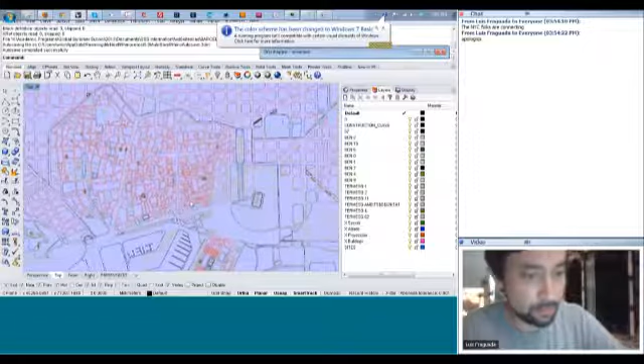All right, so it seems like New York is coming online. Okay, we're ready. Oscar, can you see and hear us? Yes. Very good. Hello Luis, hello, good morning. Can you hear us? I can hear you guys just fine, yes. Can you hear me okay? Yes, very good, very good. Can you see the screen okay? Yes.

Should I open my Rhino? Yes, just give me a little bit of insight. Have you guys used Rhino before? I've used Rhino, I've been using it for about maybe 3-4 years, but I haven't used it for the past maybe half a year to a year, so it might be a little rusty. How about Grasshopper? Grasshopper I've never used. Excellent, excellent, great. I'm excited to get you guys to try it out and play around with it. How about Philip? How's his Rhino and Grasshopper? Yeah, I've used both. I tend to work with 3ds Max.

Luis, we're thinking of sending you the meeting through my iPad, so we can work on my desk on my laptop. Would that be better? Because I don't have a double screen on the laptop.

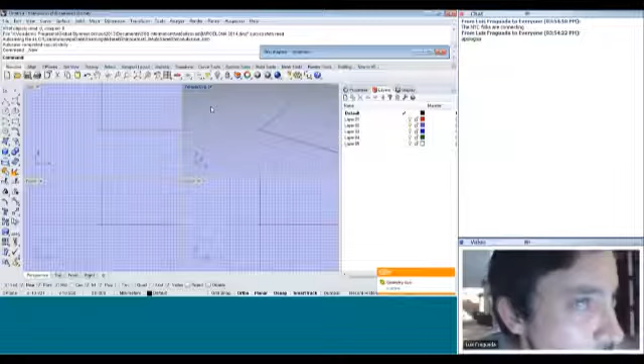Yes, that's okay. I mean, how you can connect as well on your iPad, right? Yes, I'm actually logged on to it. I see the meeting here for 9:30. So if I join it, I could probably cancel this one. Okay, give that a try, see what happens. Yeah, I have an app for the iPad.

So Oscar and Philip, this is a bit... You see in the video. Can you see?

Okay, a bit of an industrial kind of warehouse. Some other guys, this is Dori, Taran, this is Meran. They're helping us here with summer school. Now our students are actually out on the town measuring some stuff, so I wanted to take this opportunity to have a session with you guys.

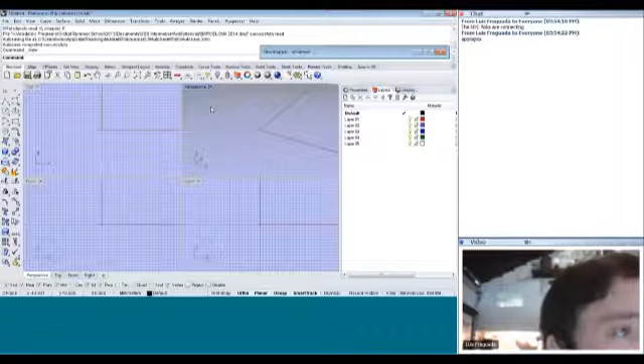Well, I hope that the session will serve as being informative and kind of introduce you to the interface, and maybe also why we would want to use something like this, this kind of a way of working. Okay.

Are you guys ready with the presentation and the laptop to use Rhino? Yes? I'm trying to... I didn't hear.

Alright, I got you guys, but you're muted. Am I muted? There it is, muted. I unmuted you. Alright, I think I have the ability to mute you and unmute you. Anyway, cool.

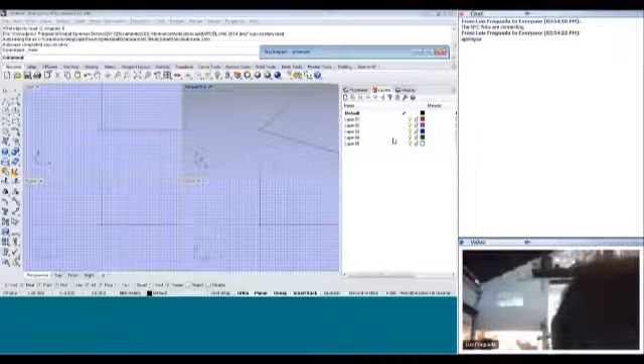Okay, so is this tutorial that we're watching today more of an introductory one? Exactly, that's right. Yeah, okay. Right. So...

All right, guys. Whenever you're ready, just let me know. Okay, ready? Yeah, I'm just trying to get this thing done. Okay, yeah, you can start now.

Okay, so what I wanted to show you is a little bit of why Grasshopper exists, how we start to use it, and its relationship with Rhino. I don't want to talk so much about Rhino, which is not typical - I usually start with a decent introduction to Rhino, but then go to Grasshopper. But I guess what I wanted to get into directly is just Grasshopper. Let me first talk about why it exists.

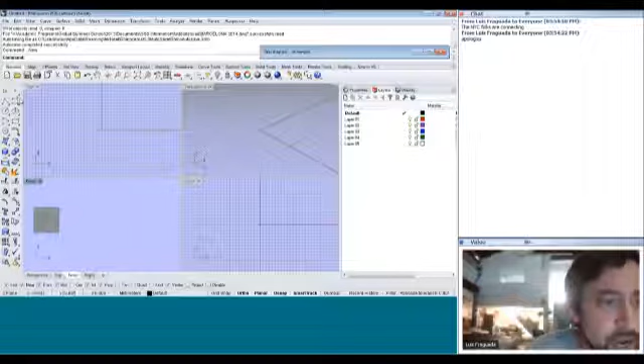So let's just go over here in the front viewport, and let's draw a control point curve. I'm going to choose control point curve with the left mouse button. It's going to ask me where I want to start the curve, and essentially I'm just going to draw four points, something like this. Yeah? Okay.

Now, because I drew this in the front viewport, it was using the XZ coordinate system that the viewport has tied to it. If I look at it in perspective, obviously the curve is sitting upright, with most of its coordinates on the y-axis being 0. So it's just a flat curve, etc.

So what I'm going to do is copy this curve, and I want to make a loft surface from it. Okay.

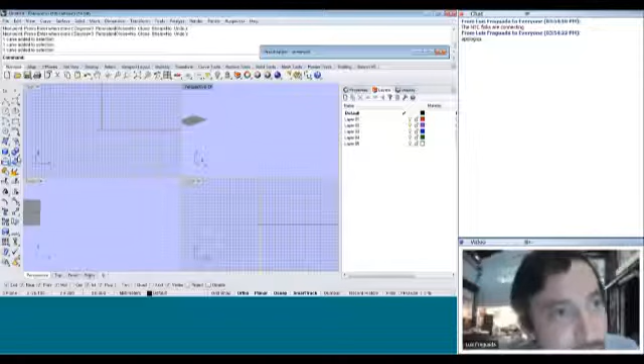I'm going to select the curve over here. Philip, if you've used AutoCAD before, Rhino is pretty straightforward. Yeah, it's a pretty natural extension, and it's where AutoCAD starts to... well, now AutoCAD is much better at 3D, I have to say. But 5-7 years ago it was still not so nice to work in 3D. So Rhino is a good extension of AutoCAD when you start really working in 3D. If you're used to the command line, Rhino has a great command line, but there's a minimum of 3 ways of doing anything: the command line, the buttons, and the menu. Anytime you use the menu or buttons, you see what command comes up, so it's very similar. Actually, Rhino used to be a plugin for AutoCAD to open different kinds of file formats, and then it got rolled into its own software package.

I am taking this curve, which is a control point curve, and I'm going to copy it. You can imagine the command 'copy' here. I'm just going to type in copy. Now if I keep reading the command line, it's guiding me, asking where do I want to copy it from, and some other options. I'm just going to click freely, click a point, make 2 copies, and press enter to finish the command.

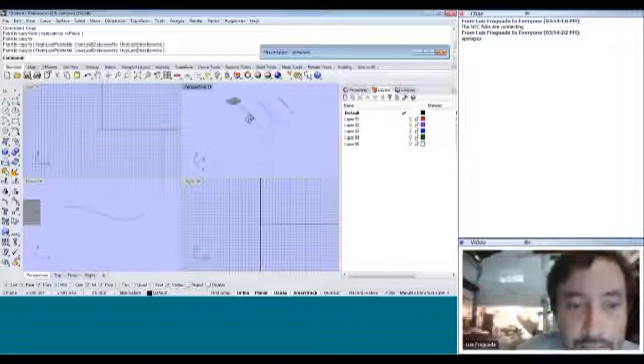So did it copy it because it's offset? Is there a certain distance it's offset at? All of these distances and numbers you can set in the command line, but I've just done it by clicking, clicking in some position, moving over in Y, doing it by hand. But all of these things you can eventually control - if I said I want to copy this from 0,0,0 to, let's say, 0,20,0, it'll make a copy exactly 20 units away. In any case, I'm just going to do it imprecisely now, just eyeball it.

In order to make this a little more interesting, I'm going to take my middle curve and edit its control points, just to make it a little different than the 2 end curves I have here. To do this, I'm going to go over to the PointsOn command, which allows us, either on a surface or a curve, to turn on its control points so we have access to edit it. Just one thing to note: Rhino excels at NURBS topologies.

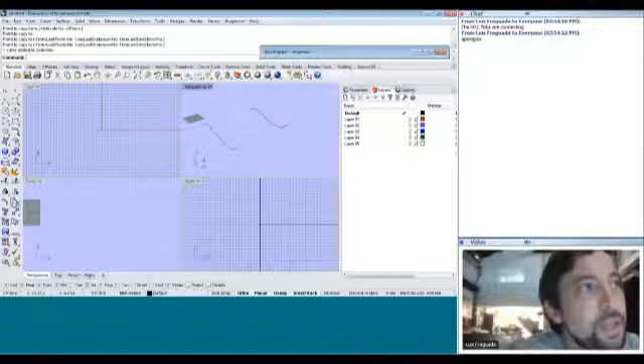NURBS is fundamentally different than a mesh topology, where things like 3D Studio and Maya really excel at creating mesh geometry. Rhino takes the approach of using NURBS, non-uniform rational B-splines, to create surfaces. It's a different topological paradigm - not necessarily that one is better than the other, just different possibilities. In a mesh, you have a list of points and a map of how those points connect to make faces. Whereas a NURBS surface is a much more continuous thing - completely continuous from one end to the next. This is what we're going to do here with this loft.

So I'm going to take my middle curve and turn the control points on. These are the same control points - all the curves are just duplicates of each other, so they have the same control points. When we started to create this curve, let's go back here for a second. By default, Rhino creates a degree 3 curve. The degree is just setting up how the control points influence the shape of the curve. You see that only the start and end control points are actually on the curve itself, and the other 2 control points are off the curve.

Let's say that instead of a degree 3 curve, I had drawn a degree 1 curve. Don't worry about doing this, it's just a bit of theory. This is now a degree 1 curve, which looks a lot like a polyline, and actually it effectively is one. There's no continuity between the segments of the curve, besides the fact that their control points are at the same position.

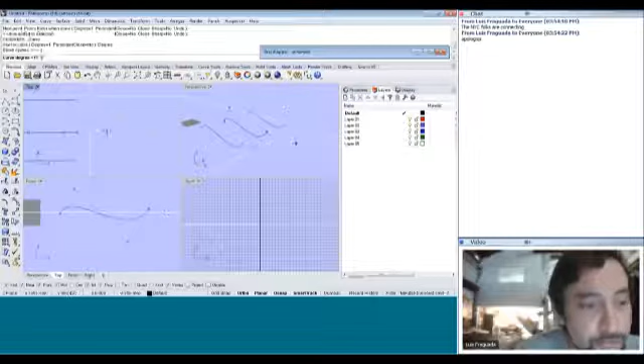If I did the same thing but changed this to a degree 2 curve, using the same control points, it should look like this. You can kind of see that we've changed the influence of the control point on the curve, and we can continue increasing this.

This is now a degree 3 curve. If I try a degree 4 curve, let's see what happens here. You see that it's going to be the same as the degree 3 curve. This has to do with the number of control points. The maximum degree of a curve needs to be the number of control points minus 1.

Totally unimportant, but this is just a bit of background to understand Rhino and things like this, and essentially why the control points we see here on this middle curve are off of the initial curve.

So what I want to do now is edit these control points. At this point, the control points are considered like any points, so we can move and translate them in space.

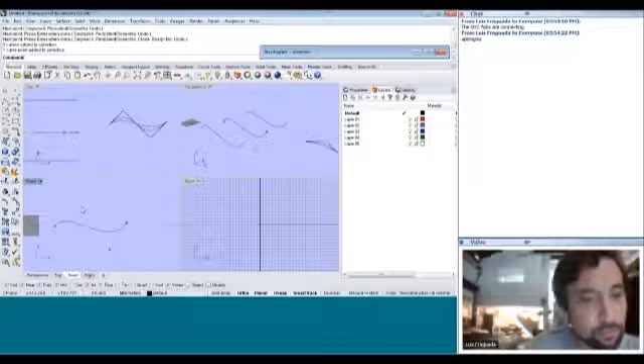So what I'm going to do is select this control point, and run a move command. Actually, instead of the front viewport, let's do it in the perspective viewport, and it'll outline a few more topics here in Rhino. I'm going to select it.

I'm going to say MOVE to move it, which is also over here down to the left in the main bar.

There is a command that you can do. You can set up quick commands for things like polyline and copy and erase. Yeah, you know, this is called an alias. Aliases you can set up.

Let me see here, I think it's in the tools and options. My options are going to look a little different because I have Rhino 5 here, but if you go to Rhino options and aliases, you have all of these, and you can keep adding more, etc.

So yeah, this is a way that you can customize your experience in Rhino.

Now, I don't know, I'm a bit dumb in this regard, but I don't actually change this too much because I seem to be working on 3 or 4 different computers at different places. So if I export my settings and bring them over, the whole thing is useless. And by the way, some of the computers I use in some places get reflashed each night, so any settings that were there are gone anyway. So I was really trying to do this for a while, but then I just decided to forget about it.

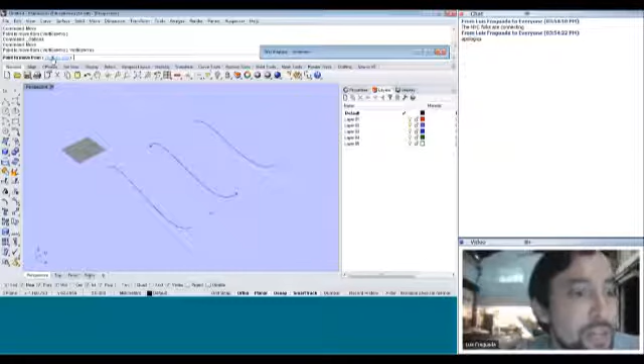So vertical here is what we would normally consider as Z, but it's based on the coordinate system you're working on. If I were to change the coordinate system, vertical would just be whatever Z is in whatever construction plane I'm using. This happens to be vertical here.

I haven't changed it at all, so I'm going to just click on vertical and set it to yes. And then I can just click somewhere, and now my movement of this control point is constrained to be in the Z axis. This can be set to a specific distance, all of this you can control, but I'm just kind of doing it here by eye.

I'm also going to take the first control point and just drag it away. You can also move things by clicking and dragging them, etc. So I'm just doing that to edit this a little bit, so the middle curve is a bit different.

Now, you notice that if I'm in this control point mode, I can't actually select the curve itself. So if I press escape, I get out of that. Now I can go back to the object level and select the curve itself. So again, points on, you can modify the control points, and eventually to get back to the curve itself.

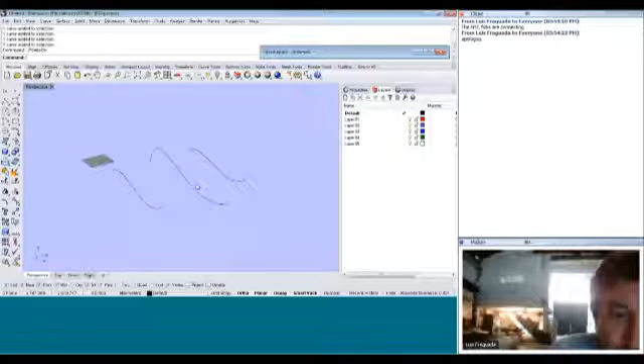Okay, so really my point behind all of this was to eventually create a loft. I'm going to select my curves, a loft creates a surface, so that's typically what we have to start thinking about. The command was probably somewhere around the surface menu if you didn't know the name, but in this case the name is quite straightforward. It's just loft.

So if I clicked on loft, and if I had my curve selected, you get this nice, smooth NURB surface. You also get some options. This is kind of just a preview of the resulting surface. You haven't finished yet because there are several different commands, different kinds of lofts that we could do.

If you want to just try a few, for example, if I just chose straight sections here and said preview, you see the kind of loft it would create. It would create a discontinuity here in the middle, and would just have the edges. It would actually create a poly surface - two different surfaces that would be joined together.

And what was the other one, the first loft? What's that called? Is that just normal? That's going to use more of a... Yeah, it's going to be more continuous. It's using the curves as just guides, and so it's going to try to make a surface that's continuous through those guides. It's similar to what we were talking about with the curve.

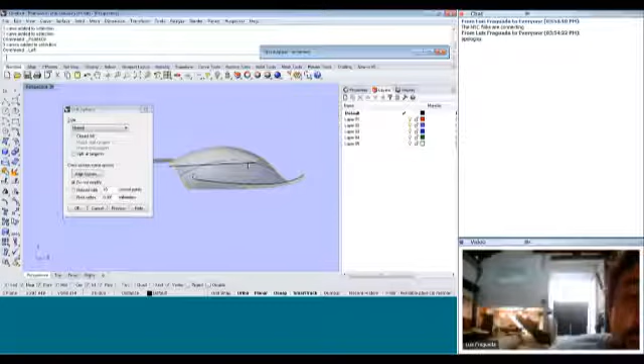No, the degree 1, degree 2, degree 3. If you go to a straight sections loft, that's kind of like a degree 1 surface, let's say. It may be continuous in one direction - if we look at it like this, it's degree 1, but in this other direction, it's maybe a degree 3. Surfaces can now have 2 dimensions, whereas the curve we had before, we could only consider one direction for continuity. So when we did a degree 1 curve, that was segments. Here, because we have 2 dimensions, we eventually have maybe in one direction a 1 degree continuity and in another degree.

But this is getting way more ahead of what we're talking about. I'm just showing you here that we have several different options. And really, the one that I want is just the default one, nothing more than this.

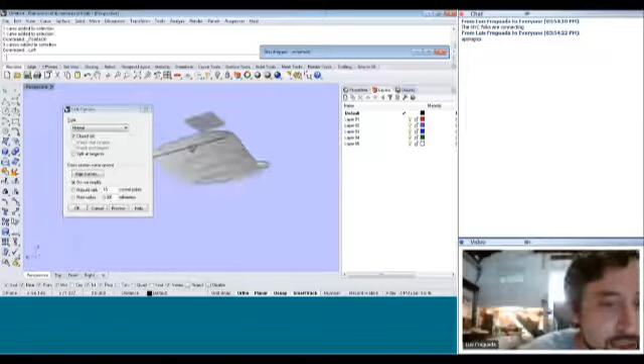And what are the other options available, such as closed loft and split tangents? Yeah, so you can try this. If I said closed loft, you would see it would try to make like a kind of tube from this. But it would be a really strange thing because at one end, my curves are kind of all in the same axis, the endpoints. So it just creates a kind of sock with a strange seam here. If we had different geometry, like other kinds of curves, we could try to create a closed surface from this.

Actually, the loft command is quite extensive. It has a lot of different options. The options down here with the cross-section curves - this is more so if you have some curves with a lot of different control points. We have a nice loft now because essentially the curves I created come from one base curve that I've copied and edited. So they all have the same number of control points, and the curves are the same degree. So we create a nice loft without too many problems. But it could be that somehow the curves you're using for the loft are coming from different operations, with eventually different control points and different degrees.

When that situation occurs, you have a few different options in order to rebuild the base curves, and then you go forth and make the loft. In this case, we don't need to simplify them, rebuild them, or align them. They're all already coming from the same curve, so we already generate a really nice surface by default.

This is something to keep in mind when operating in any CAD program. We're dealing with a topology, so the way that we drew the curves is going to influence the way the surface is generated. This is something we're going to see in Grasshopper, and it's going to be much more visual there, but right now we're just seeing this geometry for geometry's sake.

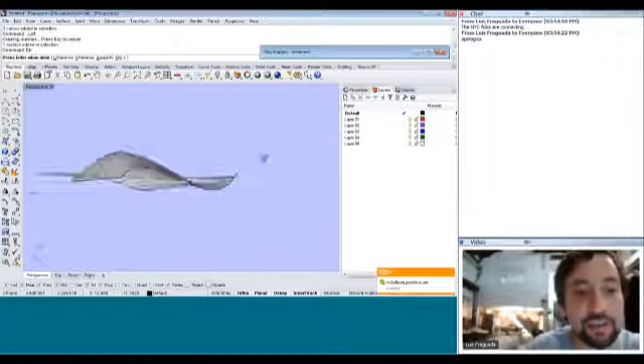All of these pieces of geometry have directions. We drew the curves with the control points in a certain direction—maybe I started over here, then over here, then over here. Because of that, and because of how we've lofted, the surface itself has a certain direction. It's pointing down in negative Z for some reason, and this is all topologically connected to how you draw the curve itself. This is something that's going to come out later in Grasshopper.

We always have to be aware—most of the issues I come up with in Rhino deal with how I draw the base geometry. If I can go back and fix the base geometry somehow, then my resulting geometry turns out much better. It's a little difficult to detect now with basic stuff, but many issues in modeling in Rhino are really topological—it's about the sequence of events that brought you to the geometry, and how that eventually generates it. The direction and things like this I don't want to worry too much about.

My point here is, we've built this loft from these three section curves. Now what happens if I take my initial curves and move them around? Well, the surface doesn't update.

I'm talking about like Maya or 3D Studio—you get this by default in a way. Maya uses what's called the hypergraph, I think, which is essentially a logical tree generated with every operation you make. You can't necessarily operate on this logic tree, but by default, the curves are the parents of this loft, so if you change the curves, the loft changes along with it.

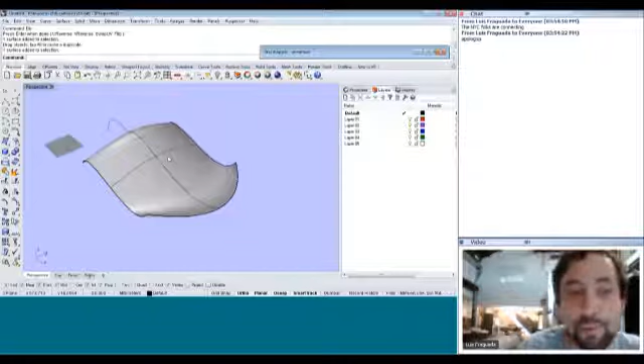For now I'm just going to delete my surface. If I wanted the surface now with these curves, I would have to loft again, et cetera. So every time I change the parent objects, the curves in this case, I have to make a new loft.

Once you've deleted it, it doesn't actually delete the lines themselves—it just deletes the surface. There are two sets of objects: the curves and the surfaces. The surface is generated from the curves, but once I finish the command, I can move the surface somewhere else, I can move the curves—there's no association between them. They're just disassociated elements once that happens.

So as of version 4, they created here...

One second here. There was a chat here.

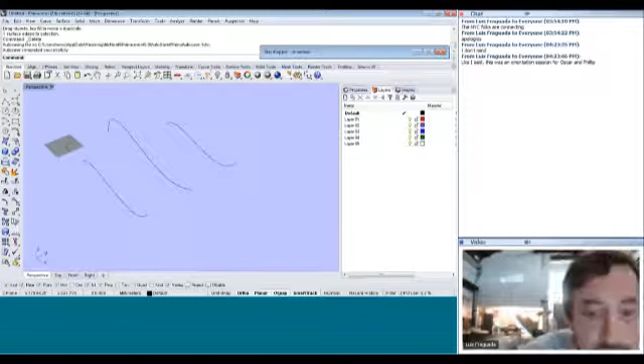As I mentioned, as of Rhino 4, they implemented something called record history. You can see it at the bottom of the screen, along the same area where we have all the other modeling aids, such as OSNAP and orthographic drawing. It says record history right here.

This allows Rhino to keep track of some of the inputs you give to certain functions. If we turn on record history, the only indication this mode is on is that 'record history' appears in bold.

So what's going to happen now is if I run that command, turn record history mode on, select my curves, and run loft, everything looks the same. I create the same surface from the same curves, but now Rhino is remembering that I used these curves for the loft.

So I can move this around, and my surface updates with every change of its parent curves. That only happens once you turn on record history. It's not shown highlighted at the moment though.

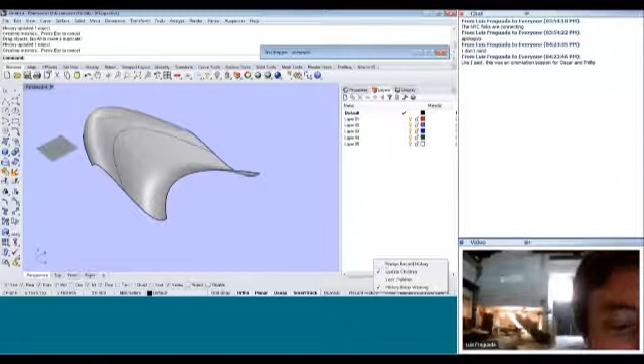After you run the command, if you right-click on record history, you can set it to always record history. I'm going to try to convince you that it's quite uncomfortable to work this way.

Let's say I had made this surface and sent it to you so you could work on it. Obviously this would be something more complex with other operations, but let's say Luis had created the surface and sent you the file, and you said, great, now I want to operate on the surface, but I don't like where it is, so I'm going to move it somewhere else.

Well, this is what would happen: we'd get this warning that says dragging broke the history on one object, because I've changed the child but haven't changed the parents.

History in Rhino is one directional. You cannot change the child and expect the parents to update. Besides the fact that this happened, you'd have no other indication - this kind of information isn't recorded anywhere. You wouldn't know unless you started playing around.

That's why I find it quite limiting. Also, not all commands in Rhino are history enabled - only maybe 30% of commands are history enabled. Those two things combined make it a really clunky way of working. It's nice for certain things, but it's very limiting.

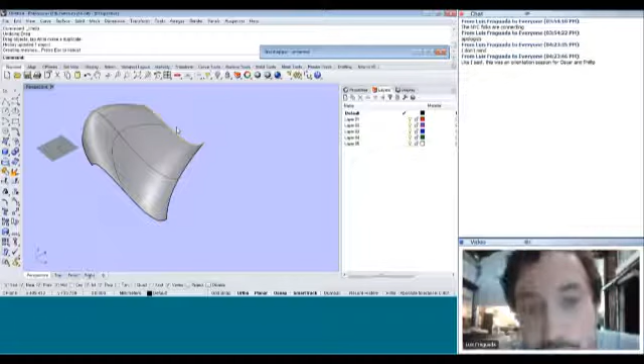I want to use the same loft example as a test to show you how you would do something similar in Grasshopper. We'll start in a very basic manner.

Luis, yes, I have a question. In my loft, my plane is not aligned with the curves. Exactly, it's a bit off. How would I do it so they can be tightly bound to the curves?

So what do you see? I see my plane, like... Yeah, it basically looks like it's connected to the two endpoints rather than the middle point, so it's just going straight from the first to the third rather than through the second. Does it look like a candy wrapper, like a candy with two ends? Hold on, let me try to show you. How can I share my desktop?

What I can do here is make you the presenter, and you can share your desktop so I can see what's going on.

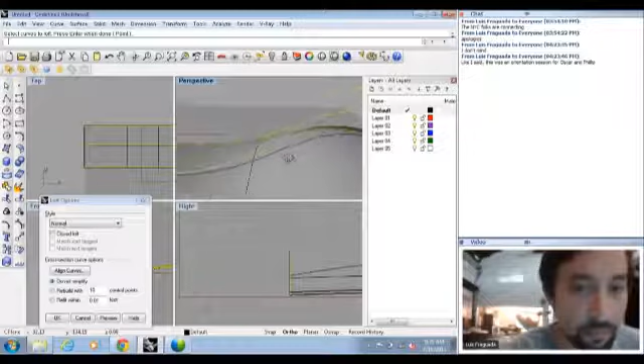Okay, in this case, can you? I'm going to ask for... Okay, say okay. This is because you've chosen the loose option.

So try to run delete the surface, and delete the surface. Run the command again, but before you hit OK, notice the options you're using. I select both. So look at the style here, loose - oh yeah, click normal, and switch to normal. Okay, and now say OK.

Oh, okay. So yeah, the loose and tight also kind of change how the curves eventually influence the resulting loft. So normal loft will attempt as best as possible to go through the curves you choose.

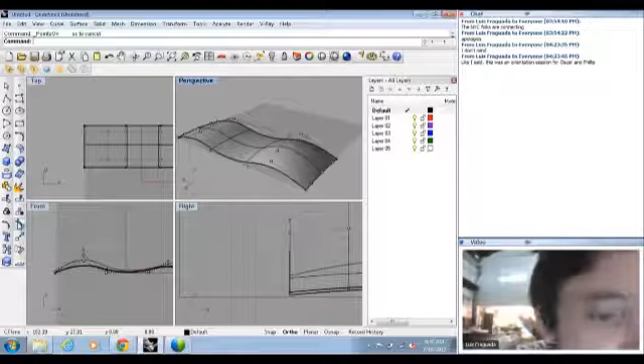But yeah, my point here was that if you didn't choose record history, then if you change the curves now, your loft is going to stay there. It's not going to update, right?

Okay, Luis, from this point, is it possible to add another curve to the geometry of the surface so that you can change a different point on the actual curved surface? You're saying to add a curve or to switch one of the curves for another one? No, to add additional ones along the surface.

No, you'd have to recreate the whole loft. You'd have to loft it again. Oh, okay, like this - these kinds of things that Grasshopper allows you to do. So with Grasshopper, yes, it is possible. Without Grasshopper, it's not possible.

That's what I meant, putting ones in between ones that already exist that you can change, sort of make it certain details. Okay.

So yeah, these are the kinds of limitations that I was talking about. I say limitations, but I use Rhino as my main modeling tool for all sorts of projects. I guess I just want to sell you the idea that things like, okay, now I want to add a curve, or now I want to do this - these are the kinds of things that in Grasshopper you can do without too many problems. You can say, okay, well actually now I want to add 2 more curves, and the loft is just going to automatically update with these new curves.

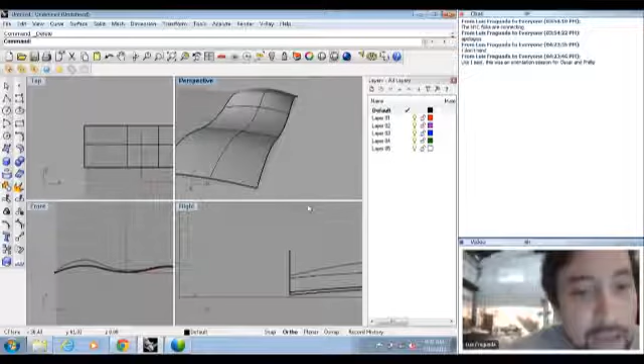Okay guys, I'm sharing my desktop again now. Okay, so let's run Grasshopper now, and I'll show you how we can do the same thing.

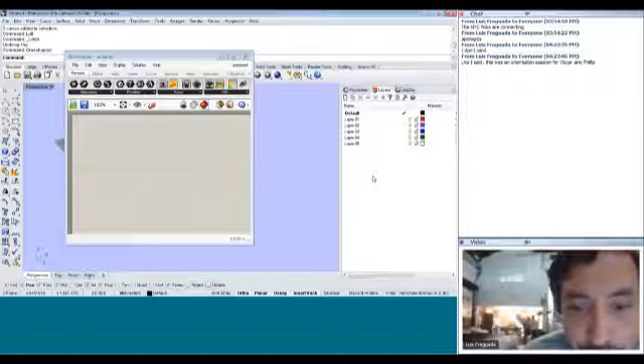Okay, so in Grasshopper here, what we see in front of us - I'm just going to define first a little bit the interface. This area over here is what we call the canvas. On the canvas is where we're going to be drawing and setting up our definitions. Definitions are the aggregation of components and the way they're connected together in order to create geometry.

Okay, so in a similar way as to how we've selected the curves and then run the loft command, I want to do the same thing, the analog to that here in Grasshopper. So we have to think - well, first of all, I should find something that allows me to create a surface. Here, Grasshopper is made of several, a whole bunch of components.

These components are organized in a similar way as how they're organized in Rhino. So, for example, eventually if I want to create this loft surface, its command is probably going to be here in surface. I have several other component areas, which are just actually add-ons, like plugins for Grasshopper. So you might not have these yet, but don't worry about that. You should probably have the components up to transform.

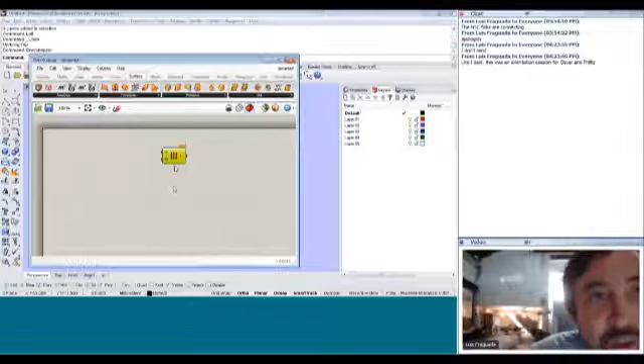Before, I just wanted to mention that, and now I'll show you a bit of how this actually works. Eventually I said we wanted to create a loft, so I'm going to go to Surface, Freeform, and Loft. I click once, that menu goes away, I click again, and I put this little component onto the canvas. Now I'm going to talk a little about how we read this component, what's going on, and how we can learn to use it. Because if you learn to use one component, no matter its function, if you learn to read what it's asking you for, you should be able to use almost 90% of the other components without any issues.

Now, a few things — you probably see your components like this, it says Loft, right? I prefer to work with the icons of the components, and to do this you can go to Display, Draw Icons, and it'll switch to icon mode. I think it's actually more helpful to work in icon mode.

I know you might think it's helpful to see what the command is, but once we have so many different commands on the canvas, it gets even less easy to read with text, so I prefer icons. You can turn Draw Icons off and see the text instead. So you can either work with all the components showing their text, or go to Display, Draw Icons, and it'll draw the icons like this.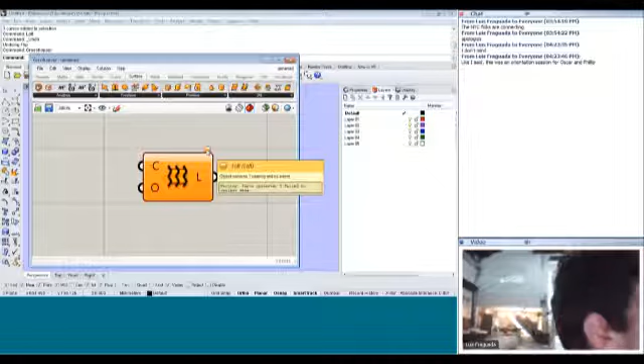In this current state, the component has this little speech bubble, this little cloud over here, and if we hover over there, it tells us this warning. It says, input parameter C failed to collect data. That's just a fancy way of saying that C, this area over here, that eventually is what we call an input, doesn't have anything going into it, so it cannot create anything.

And if we look at L, this is actually the output, the result of this operation. So the output eventually is going to be some kind of surface. But right now it says empty brep parameter, meaning that it's not generated anything, and it's giving us a bit more in-depth information. This also deals with the nomenclature of Rhino and Grasshopper.

This brep that you're seeing there stands for Boundary Representation Object. It's a different way, a kind of topological term for a surface or a polysurface. It's an object that's represented by boundaries, by edges. So if you see brep, just don't think of anything else besides surface or polysurface. It's just a technical term for a surface or a polysurface.

So there are no surfaces or polysurfaces for it to create lofts from. It's essentially going to result in a surface or a polysurface, depending on how you have the options of the loft. It's like a hierarchical term. A surface is a one-faced B-rep, a polysurface is a multiple-faced B-rep. So here, both the terminology surface and B-rep are used, whereas in Rhino you have surfaces and polysurfaces. But all of the terms are talking about the same family of objects.

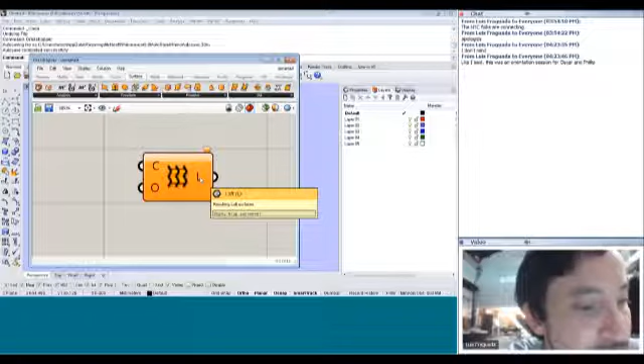What's missing from this logic is just the information to tell the curve component what curves we're going to use to create this loft. We have 3 perfectly good curves in Rhino that we've already drawn. So I want to show you how to take these curves in Rhino and link them with the logic in Grasshopper, because right now Grasshopper doesn't know that these curves exist. We have to tell it to consider these curves in its solution. So how do we go about doing this?

What does the O stand for? That's a good question. The O are the options for the loft. Remember when we run the loft command in Rhino, we get that window of options? It's the same thing, except we can set them in Grasshopper in a slightly different way. If you right-click on the O, there's an area called Loft Options, and you see we have similar options: closed loft, aligned sections, and the different kinds of lofts also available in the loft command in Rhino. So it's just an area where we can set those options.

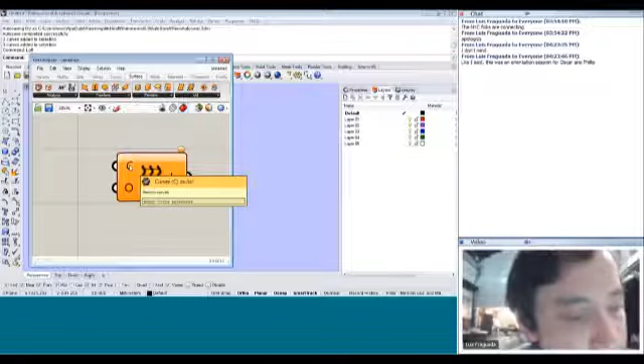Right now I want to focus not so much on the options, but on this C input. If we hover over that input, we get the icon for curves, so we immediately know we need to feed this guy with some curves. It's asking for these curves as a list because it needs more than one curve to create a loft.

So what I want to do is bring these curves that I have in Rhino into Grasshopper. To do this, and this will be true with any geometry you already have in Rhino that you want to associate with Grasshopper, we go to Params, the first tab over here all the way to the left. Here in geometry are all these icons I've been discussing, showing the kind of geometry we can use. We want to focus on the curve parameter.

I'm going to click here and click on the canvas, and we get a slightly different looking component with this curve icon. It's orange because it doesn't have any information yet. This is going to allow me to connect and reference a curve that I've drawn in Rhino into my Grasshopper definition. Let me show you how to do this.

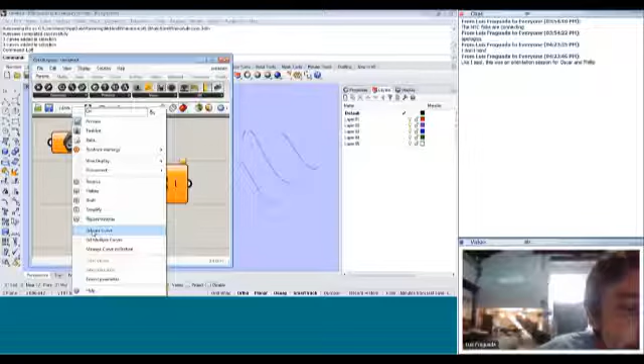I'm going to right-click in the center of this component and say set one curve. I'll move my mouse over where it says set one curve and click on it. Grasshopper is going to go away, and you'll get a message on the command line to choose the curve you want to reference. As soon as we choose the curve, we get Grasshopper back. Let's try this: right-click on the center of the component, go to set one curve. Grasshopper goes away, now it's asking me for the curve or edge I want to reference. I'll click on the first curve, and you see that Grasshopper comes back.

Another thing to notice is that the component is now no longer orange, it's gray, because it's satisfied - it has some information and we can continue and use that somehow. How did this work for you guys? Same? Okay, good, good.

So, although it's a bit redundant, I'm going to bring down one of these curve components for each of the curves that I have in Rhino. Eventually we'll see this isn't necessary - if you notice, right-clicking in the center of the component there's also set multiple curves, so we could reference multiple curves with the same component. But just to point out a few things, I want one curve component for each of my curves in Rhino. Of course, if we had 100 curves to reference, this would be completely tedious to do one by one.

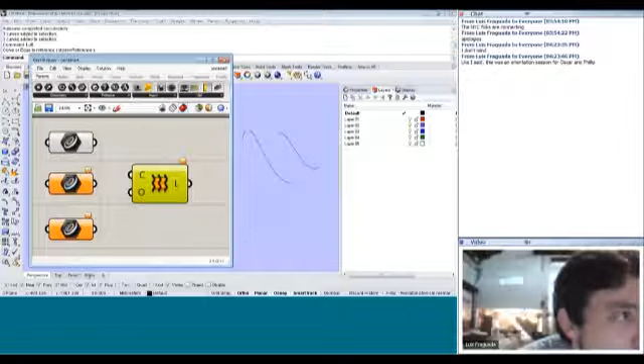So in the second component, I'm going to right-click, set one curve, and in the third component, I'm going to right-click, set one curve.

So now all of my components are gray. When you right-click, you choose set one curve, then choose the next curve over. So for each of my curves, I have one curve component.

Now notice that if you select the curve component, the component turns green, and you have some kind of reference on the Rhino viewport of which geometry you're selecting. I quickly get tired of these default colors, so I've changed mine to gray and magenta. Eventually I'll show you how to change the preview, but the important thing is that when you select components on the Grasshopper canvas, that signals in the Rhino viewport, giving you a preview of what that is.

Our lonely, lost component still doesn't have any information because we haven't done one of the most important things in Grasshopper, which is to make the connection between one set of components and the other. This is really a major part, and it's what Grasshopper is really all about.

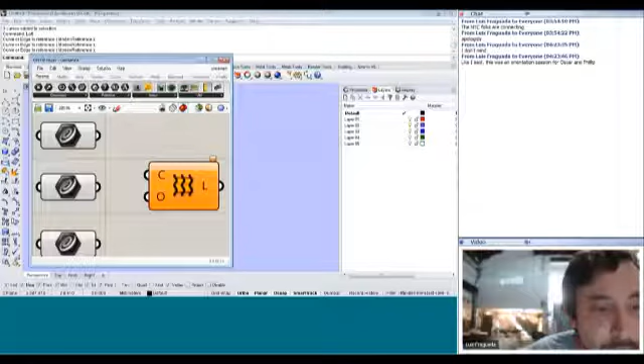Notice that in each of these components we have these little semicircles. If I hover my mouse over, my cursor changes to an arrow with a kind of cable coming out of it. If I click and drag, I can extract a cable from this output, and it wants to go to some input, so it snaps to input. In our case, the input we want is the curve, the C input. So I'm going to bring it over, snap it to the C input, and let go.

Were you able to make the connection? Yes. So somehow, and I think this is a bug, in your case is the loft component gray or a different color? It probably shouldn't be. I think this is a bug, but it should probably still give us a warning because you can't make a loft from a single curve. You need multiple curves.

If you hover your mouse over the output, you see that the resulting loft surface is null. So it's generated some result, but the result is invalid. What I need to do is connect several of these curves into the C input. But as you start trying to do this, you notice it doesn't allow you to - it's just letting you connect one thing at a time.

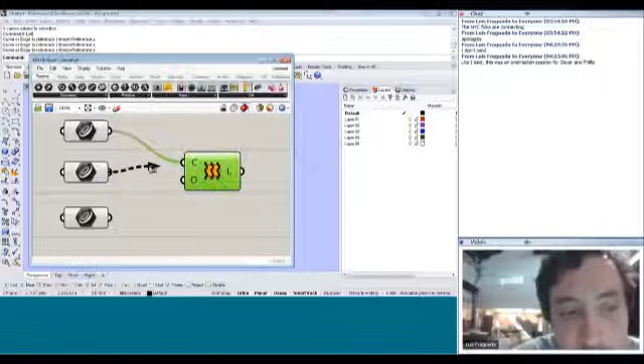It's not so difficult to fix that. I'll take this opportunity to show you that you can actually connect more than one input into this. If I drag the cable out, but instead press Shift, you notice my cursor turns green, and it's allowing me to connect more than one thing to the input. You'll notice in your Rhino preview that we have some kind of surface started to be created here.

How would I delete one? If you want to remove the connection, you can do the same thing, but now with Control. Shift allows you to aggregate a connection, Control allows you to remove it.

You can also do the same if you right-click on the input and say Disconnect. You'll notice also that if we right-click on the input for the curves, we did have the option to reference all of the curves directly into that input. Right now the option is grayed out because that input is inheriting information from an external source. We can no longer reference geometry into that input because it's getting information from somewhere else.

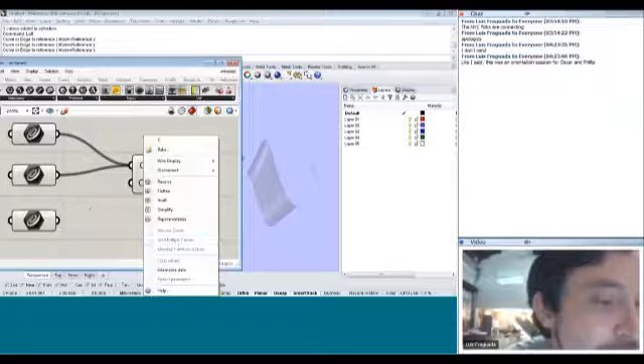It's inheriting the data. If we didn't have those connected, we would have the options to set one curve or set multiple curves, and we could do that directly with the loft component. But I'm using this to show you what Grasshopper is about - connecting components to components. Another reason this is smart: if you wanted to do something else with the curves later on, you have access to them. If we were to reference the curve directly into the input, we wouldn't have access to those curves - they would just be stuck inside here.

Now try to connect the third input, and you'll see that you generate that loft surface.

So Philip, this goes back to what you were saying about adding a curve to the system. Well, here you're kind of doing it. Now I'm adding the third curve, and you could imagine having subsequent curves, like if I copy this. We'd have to, in our current system, keep referencing new curves.

Once again, if you were to use one of the curve components as a reference for all the curves you've drawn in. Exactly, yeah, we don't need to do this.

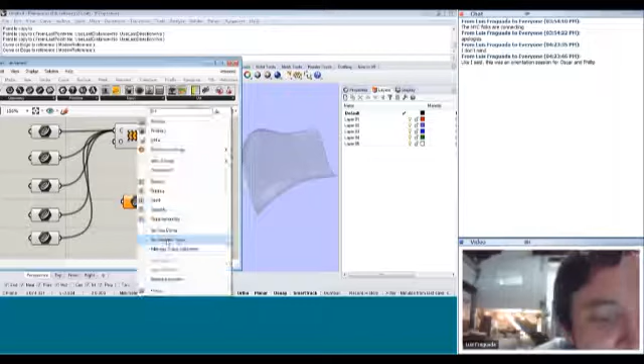So now let's see how to do multiple. With the same component, I'm going to bring down the same version. Now I'm going to right-click and say Set Multiple Curves. It's going to go to Rhino and say the same thing, so it allows us to now pick multiples. Then I press Enter, and I get the same result.

What if I wanted to add an additional curve in between two existing? Well, you could either choose it here and shift, add it like we did shift before, or you would re-reference the curves. Let's say I had another one here that I've added, I'd have to right-click, set multiple curves, and choose the curves again. Does that make sense? Yeah, but I meant in between, instead of extending it, if I wanted to add one between two curves that already exist, for example between the first and second curve.

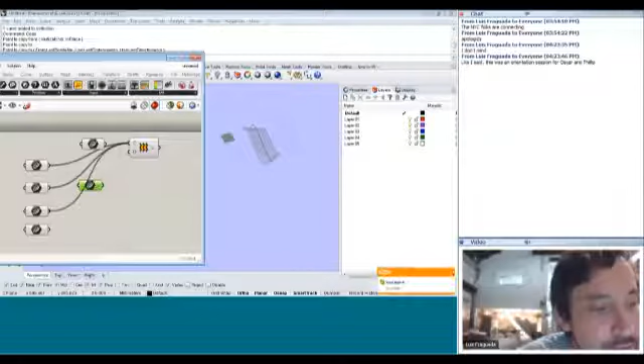Yeah, if I had something like this. In this case, I'll discuss eventually in the subsequent tutorials the topic of data management. Because in this component, notice we have this kind of cable, which is a double cable here. And before, when we were working with these other curves, we have a single cable. The single cable means that we're transmitting one thing - one point, one curve, one surface, one mesh, one anything. So it's a single solid cable. The moment I have this double cable, it means I'm transmitting more than one element, a list of objects. There's actually one other cable type we'll see a little bit later.

So why I mentioned this is that effectively what we have here, in my case, I have 6 curves that are referenced. If I wanted to add another curve, I have a few options. I can either right-click and reference them all again, or I could somehow reference the new curve and figure out with some data management components how to just insert this new curve into the list of curves before I go into the loft. So the data management stuff is here in sets, and we have a bunch of components to work with lists, particularly here like list insert, so I can insert something into another list. But I don't want to get too deep into data management just yet, this will come in the next couple of tutorials.

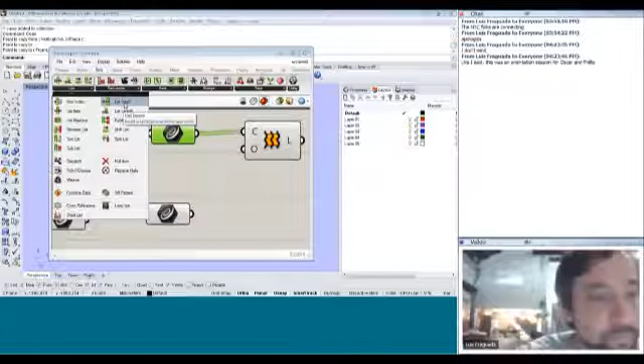But that would effectively be the method in which you'd add additional curves - you would modify the list of curves first, and then bring that into the loft. And we could do that with, for example, this list insert component. You could take this new curve and insert it into the list of these curves.

In any case, what we have now, if I actually reference, I have something kind of interesting here because I created this curve last. So if you can see my visualization, it's almost as if it transitions the curves here and then goes back to this end curve over here. And it's because I created this curve last after all of these curves, plus I did a kind of a strange thing - when I said multiple curves, I did a window selection. When I do a window selection, Grasshopper is going to give you those objects in reverse order to which they were created.

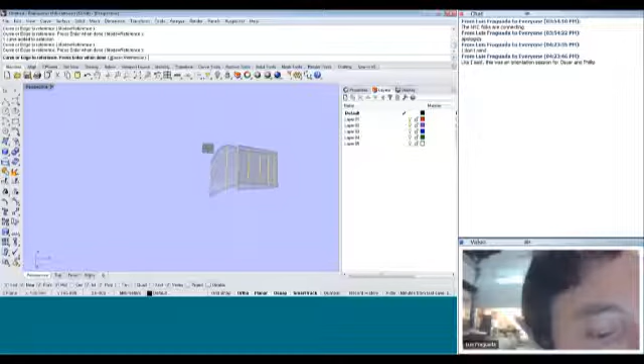So it's not actually assuming that you want the curves in the orientation according to Y - it's just the position when you added them. So if you want to control this, what you need to do is be conscious and not do a window selection, but select the curves one by one.

And then Grasshopper is going to return that list in that exact order, and eventually the loft looks like this.

If we had 1,000 curves, we're obviously not going to pick each curve one by one. There are other ways we can reorganize this list, for example sorting according to Y coordinates or other methods. This is part of the data management things we can do with the Grasshopper data management tools we'll see a little bit later on.

But that's almost 50% of the things we need to know. The first 50% we're learning today, and the next 50% deals with data management, which is quite an important topic here in Rhino, in Grasshopper.

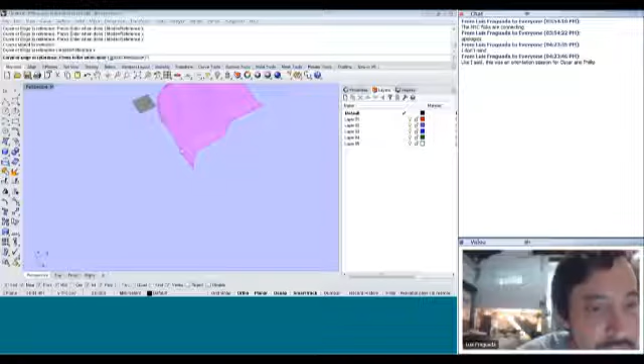Okay, so we should have some kind of loft. I'm going to go back and choose my initial 3 curves to make something a little bit more appealing. I'm just going to choose these 3 and get rid of my other curves.

You see, because I deleted some of the curves that were referenced here, now they're orange. It says, hey, you deleted the curve that I was keeping track of, so I'm going to give you a warning. Anyhow, the important part is in what we're doing over here.

Notice that if we change our curves, the loft is always going to be updated. It's going to continuously update if I change my curves.

Is that because that was done in Rhino, in Grasshopper? Grasshopper gives you this for free. This is what we do when we connect one set of elements to another. Every time we change the curves, we're changing what's happening in the reference, and that is always going to update the loft component. So we don't have to remember to define record history. This is essentially what we're doing—we're always recording history.

So a couple of things you might notice: try to select this loft in Rhino. It actually doesn't allow you to select it—it doesn't exist in Rhino yet. It only exists in Grasshopper, and what we actually get here is a preview of the geometry.

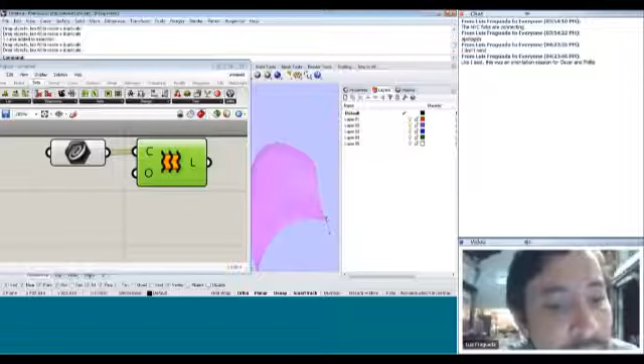Grasshopper works like this because it's agile and it updates—it's always trying to draw the minimum amount of stuff in order to be as fast as possible. So you might notice, in my case, I have kind of a very rough representation of this loft, kind of faceted here. These are just some quick shortcuts that Grasshopper takes in order to be able to be quick.

If we try, for example, to render this, my render is going to give me nothing because I don't have any surface geometry or anything to actually bounce any rays against. It doesn't exist yet in Rhino.

So let's say that we had modeled the best surface ever, that we were very happy with the surface, and now we wanted to maybe export it to a different program or actually do some other things with it in Rhino. Well, what we do in that case is select the component that is generating the geometry we want to utilize or export.

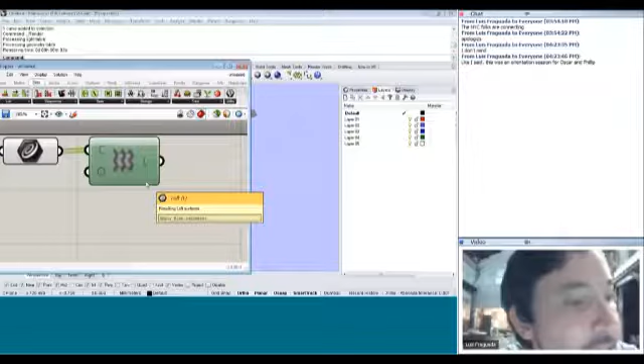We right-click in the center of that component, and here we have a few options. First, we have options for previewing, so we can turn the preview off or on—this preview is only hiding the geometry, it's always going to calculate it, just hiding it from view. We also have the ability to disable the component, and in this case the geometry is not being calculated at all. And finally, we have this kind of fried egg icon.

And this fried egg icon next to it has bake. So baking is what we do when we eventually want to use the geometry in Rhino or export it. So I'm going to select bake, and we're going to get a little option there.

And this goes back, Oscar, to what you were talking about in terms of layers. We can bake this geometry, the surface eventually, onto a specific layer if we want. We can also change the display color, the display type. We can do a few different things. I'm not going to do anything by now. I'm just going to have it land on the default layer. But if I say OK,

notice that now I get my surface in Rhino. I get a slightly strange visualization in Rhino because now I have my Grasshopper preview geometry as well as my Rhino surface on the same spot. So it has a bit of an issue to visualize this properly because it's trying to draw the same geometry in the same place. Okay.

But anyways, we can select now the surface, and I can move it somewhere else, right? And you'll notice that it's as smooth as possible.

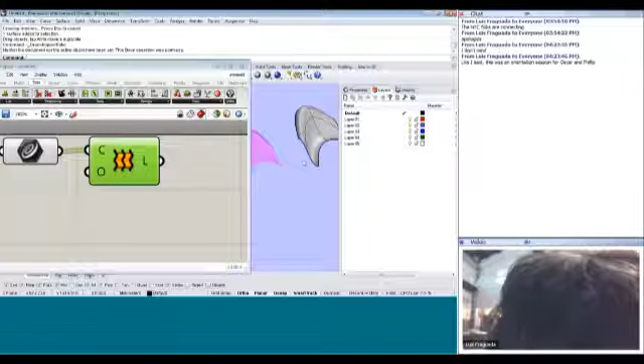So which is the Rhino one? Say that again, Philip. Which surface is the rhino geometry? Which surface is the rhino surface? Yeah, it's this one. If you select it and click and drag away, you should see it's essentially the surface you can select. Can you select some surface? Luis, we're losing you. You can select the surface, yes? Can you move it around somewhere? Yeah, okay. So this is the surface that exists in Rhino.

Now try, for example, to change the curves. You'll notice very quickly that this surface that we've baked is no longer associated with the logic that we have in Grasshopper. So it's kind of disassociated, it's frozen, it's parametrically dead. It's disconnected from all of this. But in exchange for that, we have some geometry that we can eventually render if we are in the proper viewport, proper view.

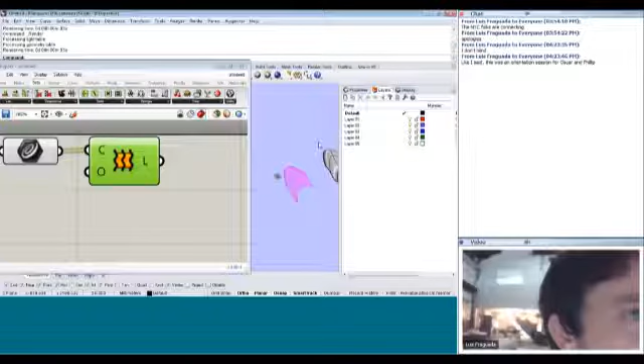So it's over here somewhere now. But yes, as soon as we bake something, it is disassociated with the logic of Grasshopper. But it allows you to export it, to run different commands in Rhino, etc. So baking happens when you're saying, okay, I'm done with this model, I'm done with this logic. Now I want to make some nice images and eventually operate on the geometry in a slightly different way than in Grasshopper.

Okay, so, but of course, our Grasshopper definitions are going to be a little bit more elaborate than this. Right now, essentially, we have two components. And what I want to do is I want to continue this a little bit and show you what else we can do now that we're in Grasshopper, just to kind of expand the example a little bit, okay?

So, what's nice about Grasshopper is that now that we've created this beautiful curved surface, this infinitely continuous surface, we can subdivide the surface into infinite points, infinite resolution, and always take advantage of this continuity that it has. With this kind of situation, let's say that I wanted to now populate the surface with some kind of geometry, okay? Let's say that I wanted to use this curvature of the surface to our advantage and orient geometry along all of the curvature that we have here, okay?

So what I'm going to do is I'm going to go back to surface and I'm going to look at what options I have here to generate some references that are based on the surface. So I'm going to try to find some kind of way to create a reference that later on I'll use to populate some other kind of geometry.

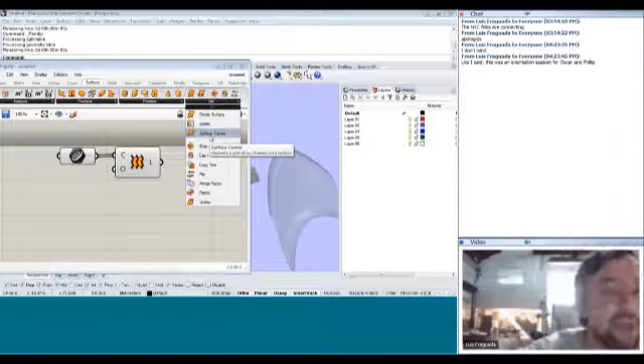So here in Surface, I'm going to go to Utilities, and I have a component here called Surface Frames. This component is going to let me create these kinds of references. So I'm going to go to Surface Frames. I'm going to click it, and then click again onto the canvas.

Okay, now I'm going to go from the lofted surface. I'm going to connect from surface to S. So from L to S. I'm going to go L, S. And if you do that correctly, you'll notice that the component itself turns gray, which is curious because we haven't even put anything in U and V, right? I mean, we've just fed the component with what it wants here in S. It wants a surface. It wants to divide the surface into a series of construction planes.

Okay, and notice that if we zoom out a bit in Rhino, we have a construction plane already here, and it's identifying the x-axis and the y-axis. And what we've done here with our surfaces, we've actually generated many of these construction planes. These construction planes can serve as orientation planes for other kinds of geometry.

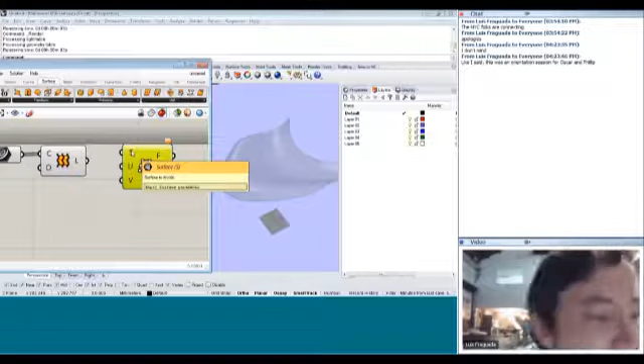Again, if you didn't know how this component worked, and we had just dragged it here, if we hover over the inputs, you see that this component asks us for a surface to divide. Do we have a surface? Well, maybe we have a B-rep that is actually one face, so that is a surface. So I'm going to connect from L to S, and that satisfies what it's asking for. It says, great, you gave me a surface, I know what to do with it now. I'm going to eventually subdivide the surface into a bunch of construction planes.

Now, notice over here, the U and the V. If you've ever done any sort of texture mapping, you might recognize U and V from that. U and V are essentially defining the two dimensions of the surface. Imagine that, obviously from our perspective, we see the surface in 3 dimensions. In our 3-dimensional world, the surface has curvature, it's traveling up and down, etc.

But now try for a second to imagine that your world, the world that you live in, is on this surface. If you live on the surface, you don't know what is up and down. All you know is forward, backwards, left, right, diagonally, etc. You actually are constrained to the surface. You don't know what an offset is. You don't know what Z is. You only have U, you can only travel in U and V coordinates. So from our perspective it looks 3D, but a surface can actually be considered a 2-dimensional object.

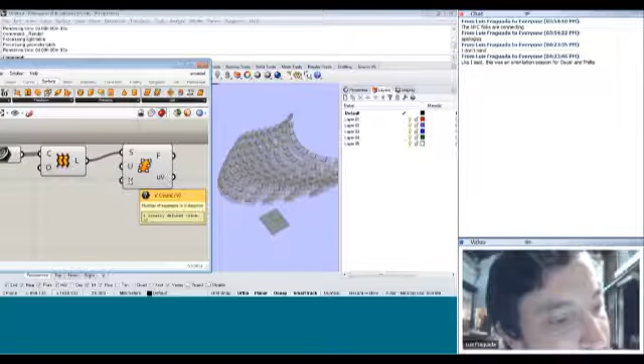A little confusing, actually. But in any case, I want you to try now to modify these values and input a different value for U or V. So I'm going to right-click on V, and I'm going to say set integer, and very carefully move over to this new panel that pops up, and just put in, I don't know, 30. Once I hit 30, I'm going to select commit changes. And you'll notice that in the U direction, it's now subdivided into 30 parts.

So I generate many more construction planes in the U direction. And I can try this again with the V direction. I can right-click on the input V, go to set integer. Did I do that in V or... oh, I actually did that in V, sorry. I'm going to check the other input, U in this case. I'm going to go to U, set integer, and I'll try 50.

So now I'm generating so many construction planes that they're overlapping each other, and it's hard to see an individual frame. So that's one way that we can enter values directly. Now that's fine, but we actually don't know what the values are. The only way we would know is if we hover over the input and see what you had entered in there.

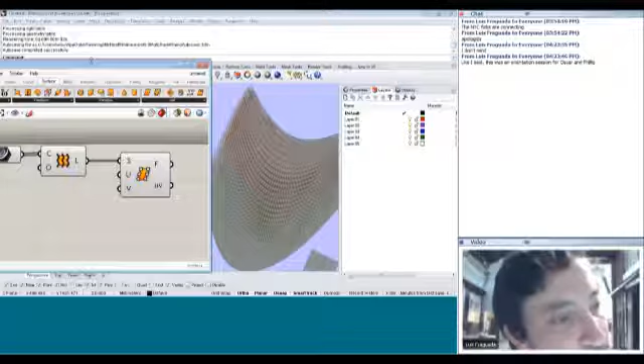So I'm going to introduce you now to a few more ways that we can input these numbers. Here I'm going to go back to params, the first tab. Are you guys with me so far? Yeah, yeah, okay cool. So I'm going to go back to params, and I'm going to choose input, and I'm going to choose panel.

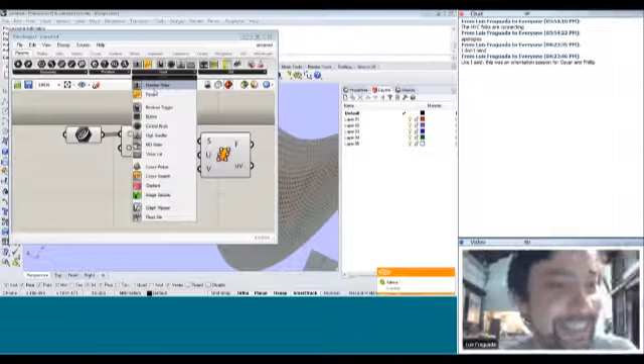Okay, so what I wanted to discuss here is to go to params input, and I'm going to try here a panel. And a panel is a way, it's a multifunctional component, so we can use it to annotate our drawing. I could double click it, as it's telling me to just start to write. So I could say, hi there, New York City. This is a way to write a note. And I say okay, so it's first a way to annotate the definition.

But we can also use it as an input device. I could just write number 30, say okay, and connect this to U and V. Right now I don't see any difference, but if I switch this to 60, this updates. Now let me ask you something: did you get the component turning red?

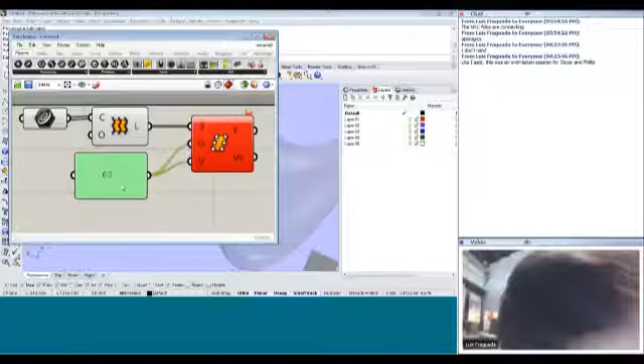No? Okay, well it's a very common mistake to have something like this happen. Let me explain because it might pop up at a certain point. I did something while entering this number that I didn't notice, because it's something we do almost without thinking, very intuitively. But because I did this intuitive thing, the component is now confused, and it's a definite error. When a component errors, it turns red, okay, as such.

So when that happens, I have a little message bubble pop up, and it says error: data conversion failed from string to integer, okay? Now what I've done, and what you haven't noticed, and what you didn't do, is that when I entered the number into the panel, I mistakenly pressed enter. And then I said okay, okay?

And this action, maybe I'm the only one that does it, but it's just something I'm used to, because in computer program paradigm you usually enter something and press enter, or on the internet you enter something into a text field and press enter. Well, now when we press enter, what essentially has happened is that the component is considering this as a kind of text, as a kind of paragraph, okay? So that's why the warning says fail to convert from string to integer, because a string is the name of the data type for something that deals with characters and text.

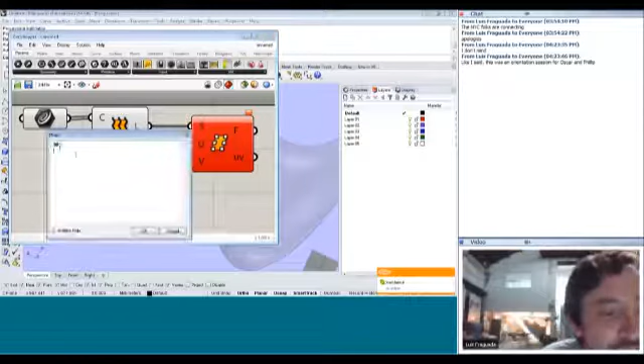So if you were writing your name, that's a string. If you're writing a sentence, that's what in programming languages is considered a string. So because I pressed enter, there's an extra value here, a new line, and it considers it a string. So the only way to fix this is to make sure the cursor is always next to the number and say okay. If you want to try to activate this error just so you can see, just enter this number in here, press enter, and say okay, and you'll get the error. So eventually, I hope you don't run into it, but more than likely you'll probably run into it.

What's this, sorry, what happens if you input more than one number? So if you press enter and then type in another number underneath?

Yeah, it's still going to consider it a kind of paragraph, and I'll tell you why. Right now this is actually like if you, in Word, had written 60, enter, 60. It's still considering, even though it's numerical characters, it's still considering it as one paragraph, because we are not doing something here which is actually outputting a list of these two, okay? I don't want to get into that, it's something I'll explain a little bit later on, but we can actually get these numbers to come out as a list instead of just one thing.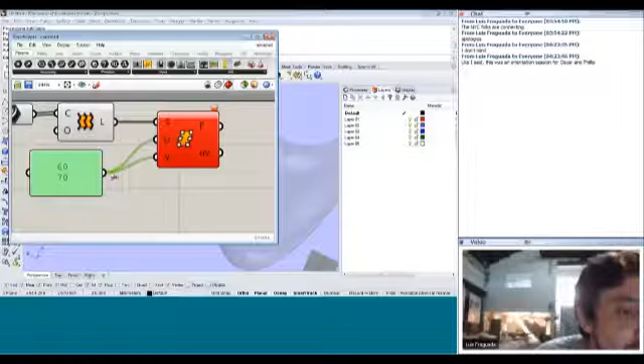You'll notice here, if I don't do that, it's still giving me the solid cable, meaning I'm still transmitting one element. So it's only transmitting one object, and this one object is composed of these four characters, and it doesn't know how to transfer this into a number. It sees 60, enter, 70, and it doesn't know how to actually convert that into just one integer. It's not going to make any assumptions for you. So this is why we get this error. For now, the best way to fix this is to ensure that we have one number and that the cursor is next to that number.

I'll discuss a little bit later on in subsequent tutorials how we can actually write a list of numbers. Okay, so this is one way that we can enter numbers.

Another way is we can use, here in params input, the number slider.

Sorry, I'm in need of a bit of coffee.

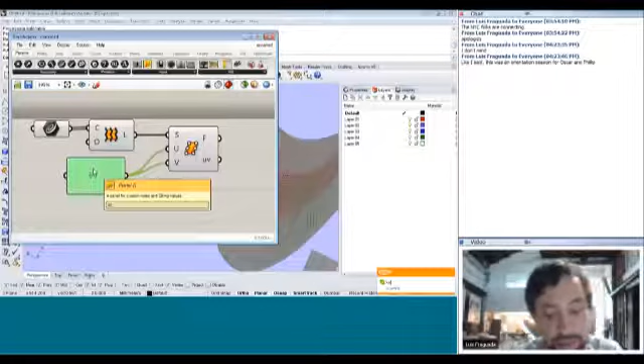The number slider is something you'll probably use quite a lot, because in the control panel, or the post-it note panel, we always have to double-click, enter the number, and press OK. So it still makes us go in, type it, and accept that number. If we bring down the number slider from params input, we get this component that has a little dot, and we can click and drag this dot around to choose different numbers. The number displayed is the output of the component.

Notice something though: first, these numbers go from 0 to 1 by default. Second, it has 3 significant digits after the decimal point. So these numbers are useless to us for what we need now. We need whole numbers, integers, at a much broader range than just 0 to 1.

So in order to change and modify these parameters, I'm going to double-click on the slider, and what I get is an options window that allows me to change the parameters for the slider.

For example, let's say I didn't necessarily know how many construction planes I wanted in each dimension, but I wanted to play around with it. I'd say, well, maybe I want no less than 10 subdivisions in one dimension, and I don't want to consider more than 100. So minimum I want to play around with is 10, maximum is 100, and by the way, I don't need such precision in my numbers. I don't need to deal with real numbers, I want to deal with just integers.

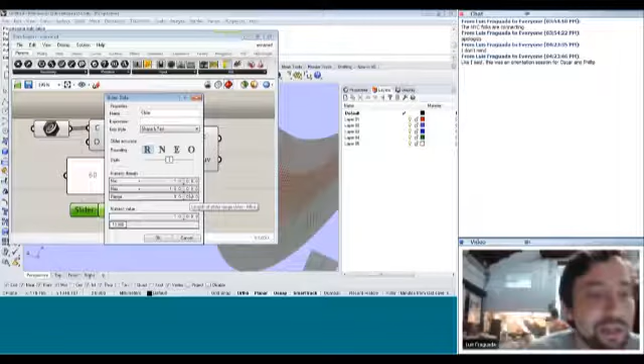So I'm also going to go over to rounding and change this to integer numbers. Again, I double-click on the minimum and maximum and change those to what I want them to be, and press this little green check. I can also define the default numerical value by sliding around down here. If you like, you can change the name of the slider. I can say, number of divisions, something like this. And then I say OK.

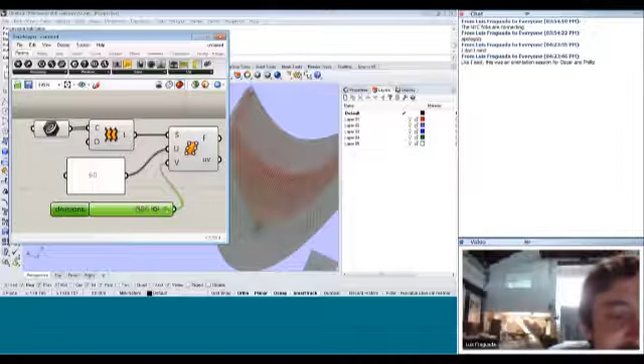So that's how we edit a slider. We go into it, change its minimum and maximum, and change the slider accuracy. Then we get a nice component which we can play around with and get different results. I'm going to connect the slider now to V, not with shift, just a regular connection. You'll see that if I change the slider, it changes the subdivision of what I'm generating. I'm actually going to use it for both U and V.

Do you get something similar to this?

Hello, guys? Yeah. Yeah? Okay. All right, so, my model comes out red. How do I change the color again? Like the surface and such? Yeah. Okay, yours is gray and mine...

Do you have this little button here, document preview settings? Click on that, and you can change the normal and the selected color. If you right click and use this color picker, you can choose different colors and also give it a bit of alpha. So this is how it's going to come out normally, but you also have the color for when it's highlighted or selected, so you can choose different colors here with the color picker.

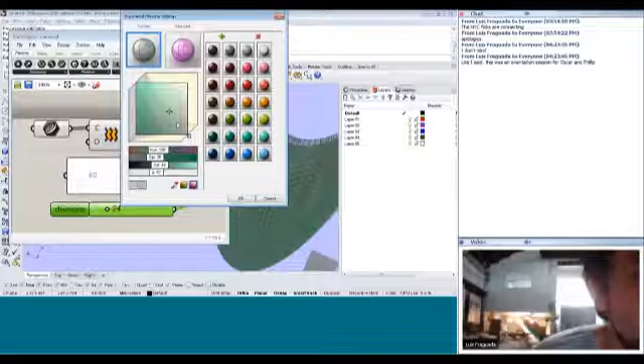You can move them around like this or like this, and choose what color makes you happy. I choose kind of a grayish and magenta. Choose something also like light blue, also works really nicely.

But it also will make your Grasshopper definitions and screenshots stand out. It takes different people different time to get sick of the red and green color, and eventually they switch it on their own to something else. It took me about 2 years to finally decide I can't stand seeing these two colors anymore.

Now for you, because you're in Rhino 4, this is just changing the preview colors for this actual file. If you want every new file to switch, it might not have even changed them for you, because there's a bug in the version for Grasshopper for Rhino 4.

But if you select everything you have on the canvas, press Control C, then press Control N to start a new file, and then press Control V, your colors should be updated—maybe not actually, because we haven't changed the default. This is just something that the version for Grasshopper Rhino 4 didn't get updated.

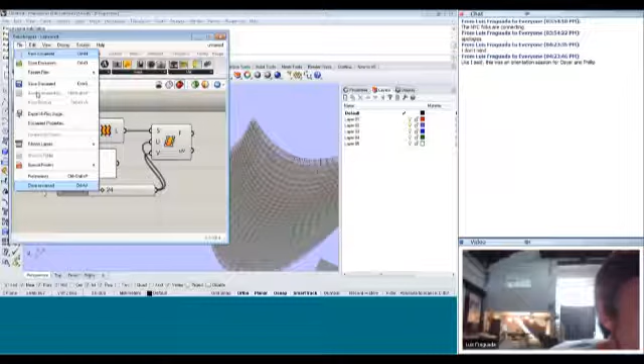I think maybe in File you have the preferences, or in Edit you have preferences. Or no, you have Window—yeah, you have an extra menu here called Window, I believe, and there you might have the preferences. Is that correct? Nope. You don't have Window as a menu? Nope.

So you're on Rhino 4 or Rhino 5? Rhino 4, are you on? You have Rhino 4 or Rhino 5? Pretty sure it's Rhino 4. And you don't have—okay, well anyway, but the changing of the colors works? Yeah. Okay, sorry, I just had some students this morning that had some issues. Anyhow, let's finish this off here.

So now finally I have all these construction planes. Let's put something on there that's oriented to all these different orientations. You'll notice the construction planes here are normal to the surface at different points. So what I'm going to do is put some cones on here that are oriented in these directions.

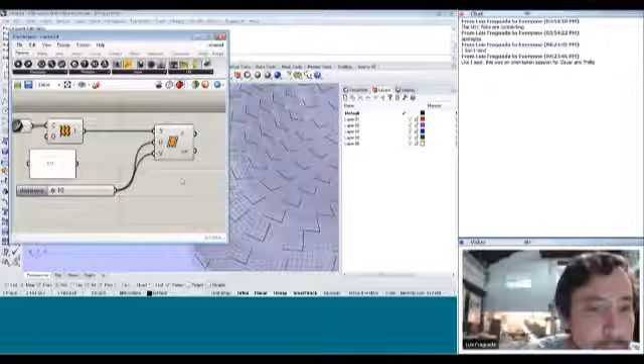Maybe it's best at the moment to lower the number of subdivisions, because eventually we're going to generate some geometry on here, and it's best to start with a low number. So I want to put some primitive geometry on these construction planes coming out of F. I'm going to go to Surface, Primitive, and Cone, to put some cones on there.

The cone actually has 3 inputs: the base plane, so the base construction plane; the radius; and the length, or the height. So actually—yeah? You use the geometry in the cone? This is Surface, could you repeat that? Can you go back to that? Yeah, it's Surface, Primitive, and Cone. Okay, you see what that is? Yes, got it.

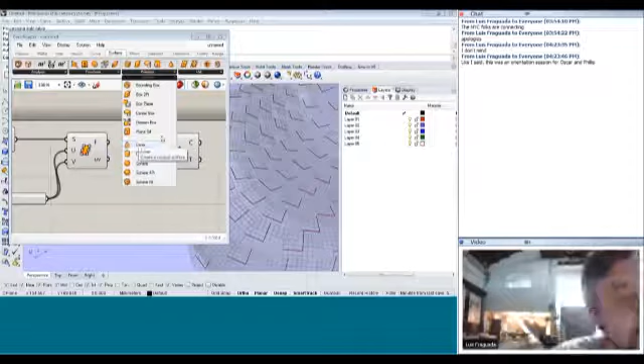So here we have to feed it properly. In terms of the base plane, actually what I want to give it are all of the construction planes we're generating over here, so I'm going to connect from the F to the B. We have a slightly different cable, but don't worry about this at the moment—I'll explain it later on.

In my case, my cones are being generated but they're very small. The radius and the length are a very different size according to my surface. If I zoom in quite a bunch, I might eventually start to see the cones, okay? But I need to change the radius and the length to something a little bit bigger. In my case, I don't know what yours looks like—can you see the cones? Where?

Maybe you can see them, maybe you can't. But what I'll do is use my panel here, and connect my panel to the radius and to the length, and maybe you can start to see some kind of cone.

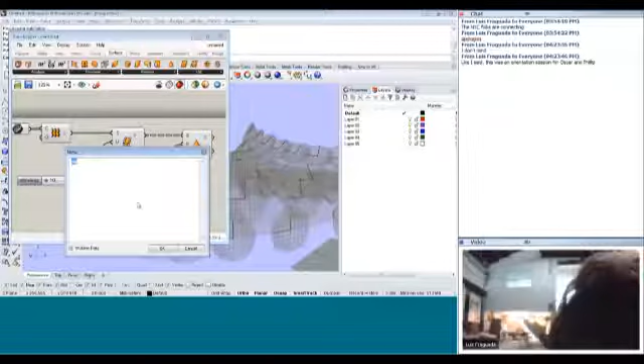Do you get some cones in your viewport? Yeah. Okay.

And of course, if we were to go back and decide that we wanted some more divisions, I can just increase the number of divisions, and it would generate a cone on every one of those positions.

Now, tell me something. Are your cones facing down like mine? Yes. Okay, so this ours are a lot bigger as well. Yeah, so maybe it's just because we drew this curve kind of freeform, the initial curve for the loft. So you might want to tweak your panels to have smaller sizes, because when we started the whole exercise, we freeform drew the curve.

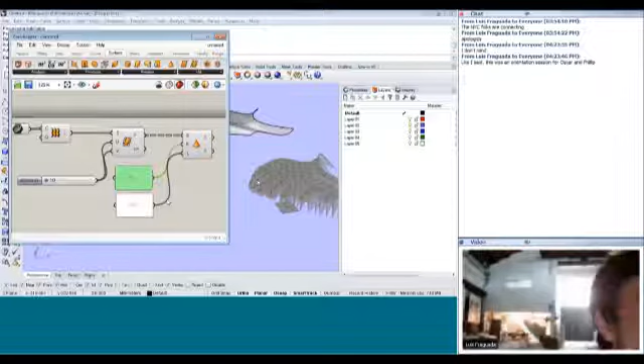So when I drew the curve in my front viewport, I drew it from left to right, so the curve had a direction that's from left to right. I copied these curves. All of the curves had the same direction. Even if I changed their control point position, they still had the same direction.

So when I lofted the curves into a surface, the surface itself is going to be formed by the direction of these curves somehow, and it's going to take on a direction itself. So the surface has a direction facing down.

So what I'm trying to say is, if I were to change the direction of my initial curves, I would then change the direction of my surface, and therefore I should have the cones pointing upwards. Okay, so let's try that in Rhino.

So somewhere in this mess of geometry, if we just window select, we have our curves, right? Yes. We should hide all the other pieces. We shouldn't have anything else there. If you have surfaces, just delete them. We should only select 3 curves.

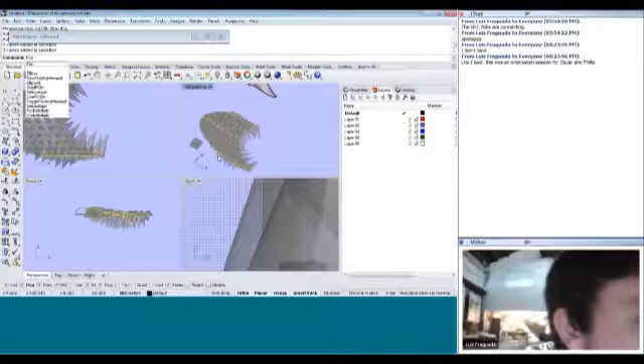Now these curves have a certain direction, and I could flip this direction by using the command flip. And press enter, and notice what happened.

I changed the direction of the curves, meaning I changed the direction of the surface, meaning I changed the direction of the cone. So it's all topologically linked together.

Okay, so this is essentially where I wanted to get with you guys today, just as an introduction to Grasshopper. Do you guys have any questions? I know it was kind of a quick shot. No, I mean, it's pretty straightforward. I think I understand everything up until this point.

Thank you. So what I would suggest you guys look at, I'm going to give you a link here to a nice site. One second. It's digitaltoolbox.info. And I'm going to write it here in the chat. This website has Rhino and Grasshopper tutorials. If I go over here to Grasshopper Basic, for example, it has a bunch of video tutorials explaining some of the things that we saw today.

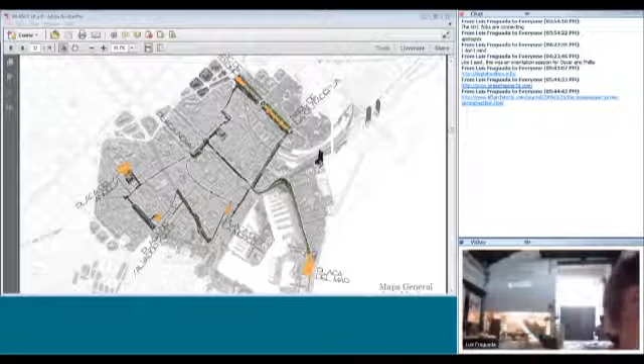Have you guys been to Barcelona before? Yes. I haven't. No. I have.

The plaza is in an area called Raval, and in the plaza we're working in, they've just built the new Filmoteca, a film library and film event center, which prior to this was distributed around the city into different buildings. Josep Lluís Mateo, an architect in Catalonia, recently completed the Filmoteca, about 6 months ago, along with the plaza around it. There was a plaza here before.

But this corner is a notorious corner, for a few reasons. When you arrive to Barcelona and the Raval area, at least personally, it's an area I really enjoy going out to, to socialize. There's a lot of nice bars, and it's fairly cheap, low cost, nice places to socialize. But it also has a bad rap because there's a lot of pickpocketers and this kind of thing.

Particularly in the corner we're working with, it's historically been a spot for prostitution. The prostitutes congregate there, one of the last spots in the middle of the city where this still happens. This is historical because the cross streets led directly to the port, so ships would come in, and the people working on them would come into Raval to take their time off, and one thing leads to another.